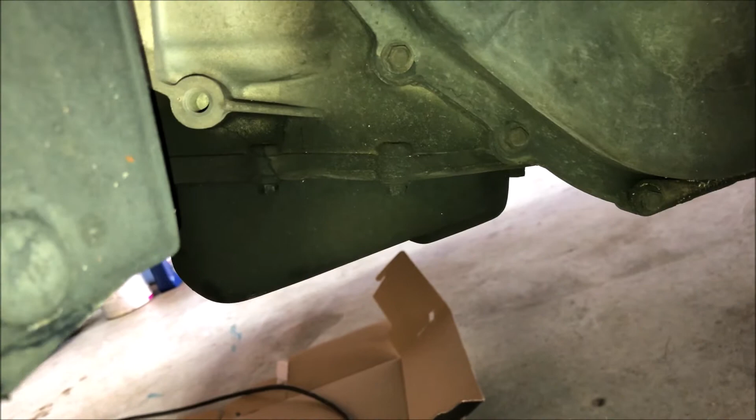So hang with me and we'll get to work. I'm on the driver's side, let me show you what's going on. This is the side of the transmission here on the driver's side, and you can see, I don't know how well it comes out on video, but there's a lot of dirt, and looks like after driving it for a while, the cover looks wet and grimy, like there's some oil. That's what I saw when I was rotating my tires, and it made me want to look at it a little further. So now I'll crawl underneath and show you what's going on.

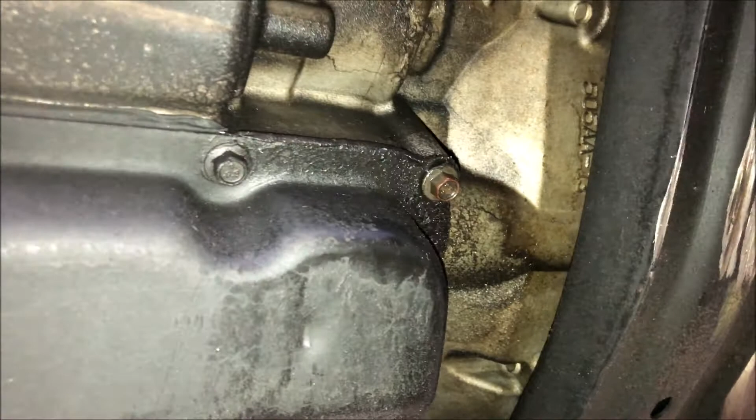Videos underneath vehicles are always kind of hard to actually see what's going on. This van has about 90,000 miles on it. We bought it new, so we're the only owner. The service manual says you don't need to do anything with transmission fluid for over 100,000, 120,000 miles, I don't know. Some other sources though say you should change it every 60,000. So either way, I think it's time to just change it out, since it's a pretty simple process.

But if you look at this bolt right here, it's actually wet, and that's transmission fluid. And you can see over on the transmission here, it's wet up back here as well. And on the transmission cover around this corner, it's wet and grimy. So I'm pretty confident I do have a small transmission fluid leak. I've been checking the levels, it's not dropping significantly, but there's definitely something going on. And like I said, it's 90,000 miles. So I'm going to go ahead and drop the pan, replace the filter and the fluid, and hopefully get rid of this leak.

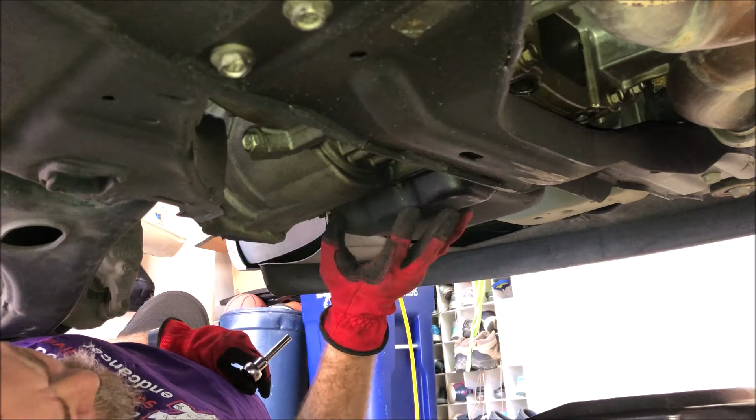There are 12 bolts holding the bottom of the transmission pan up. You can use an 8mm socket, but I find that a 5/16 actually fits a little bit better, so that's what I'm going to use. I'm going to break the torque on all of them just to make sure they'll actually move. My plan is to remove the ones at the back and leave the ones at the front installed so that the pan can hinge down, and hopefully, if all goes well, the fluid will all show up in the catch pan and not go everywhere in my garage. We'll see how it goes.

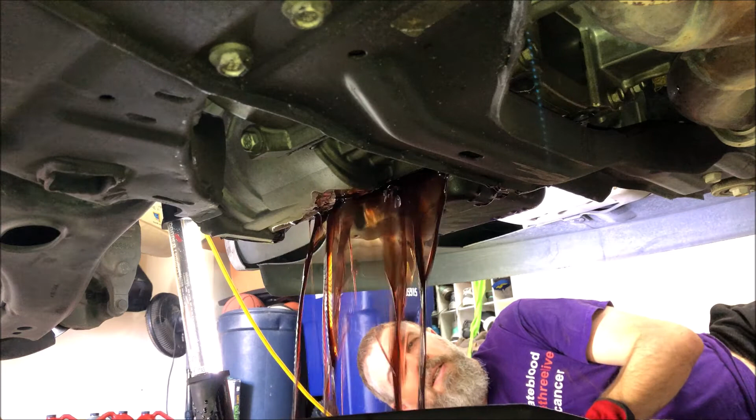Someday I'll be able to not mess up the floor. Today is not that day.

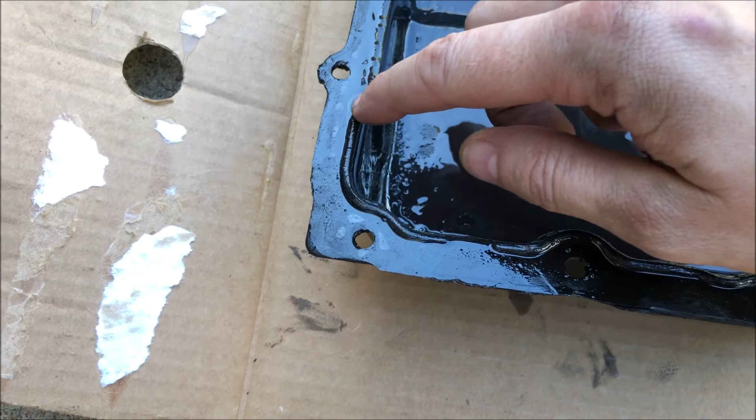You can actually see the gasket material is missing over here, which is probably why I was having the leak. The magnet is over here, and that's a good amount of gook. It's all really fine particles, so I'm going to go with the mindset that it's fine, it's just 90,000 miles, and we won't worry about it.

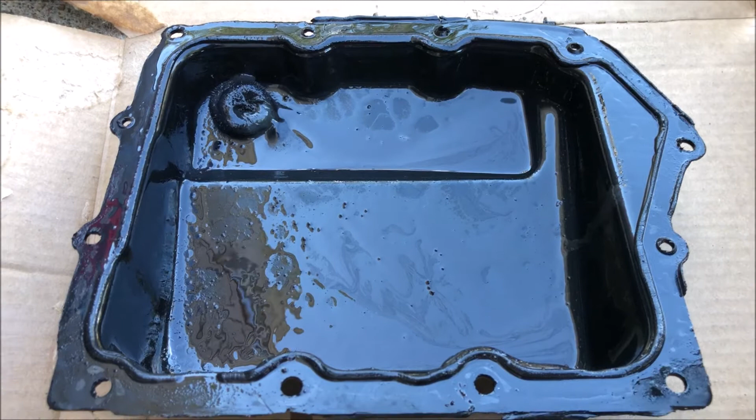So I'm going to clean it all out and remove the gasket material, and then get ready to put it back on. I have cleaned off the gasket material from the cover, cleaned out the cover, got some brake clean in there to get it all cleaned out well, magnets cleaned off, took a wire brush to the bolts, so the cover's ready to go back on.

Now I need to get up underneath, remove the filter, and clean the mating surface so that the new gasket and filter can go in. To remove the filter, there are two T25 fasteners up here, so they're Torx tips, you need to have a T25 bit ready, and you just remove the two bolts and then wiggle and pull the filter out, because it's actually sealed up in there as well, there's a seal you're fighting against. Now before you pull this out, you need to realize there is still fluid in the filter, so make sure your catch pan is underneath it and dump it into the catch pan. Try not to get it on the floor.

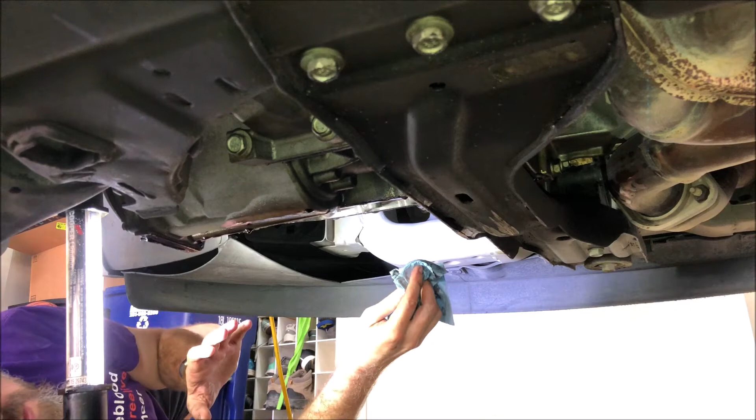Now that the filter's out, the next job is to clean everything off. Clean any gasket material off the mating surface, and there's also the seal up here that some videos say will actually come out with the filter.

I've never had that experience. You want to try to remove that seal as well without damaging the bore, but I'm not going to take the risk of damaging the bore by fighting with the seal. I'm just going to reuse what's in there. If you disagree with my choice, I'd love to hear your thoughts in the comments.

I'm going to put the new filter in place. The new filter goes in the same way the old one came out, and I'll put a link in the description for the filter and gasket I'm using. Just put this spout back up into the seal, then tighten, but don't over tighten those two Torx tip bolts.

Okay, so I have all 12 bolts back in. They're all hand tight. So next I'm going to get out the torque wrench and torque each of them to 105 inch-pounds in an alternating crisscross fashion.

Okay, all torqued, triple checked. So now I'm going to put the wheels back on, put it back on the ground, and we'll fill it up. All right, so the van is back on the ground, and the next question is, where do you put the fluid in?

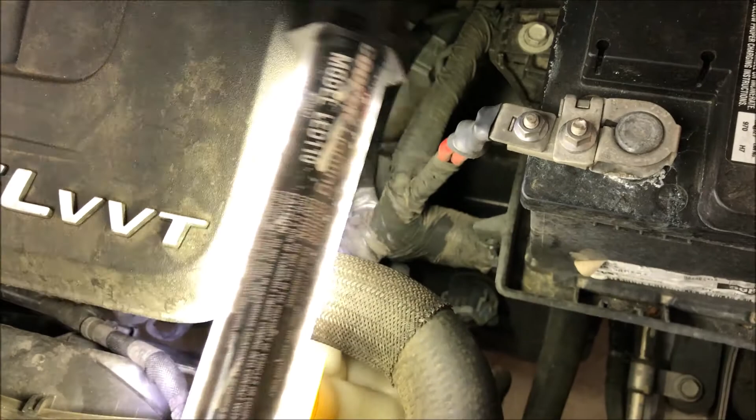It's kind of hard to find unless you've looked for it a few times. So the easiest thing to do is, there's your battery. Then you've got this main harness running off the battery, and you see how it comes together into a junction. Underneath it, right here, is a cap. It's a quarter turn cap, and that's the top of the funnel, or the tube that fills your transmission.

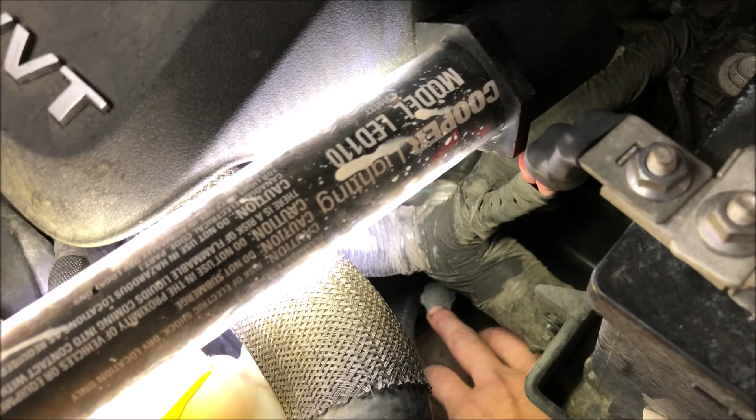To take the cap off is pretty easy. Just unscrew it, take it out, and now you can put a long funnel in there and fill up your transmission fluid. So that I don't lose this cap, I put it right in this hole. It's perfect, like it was designed for it.

The words of wisdom are to measure the amount of fluid you pulled out of the transmission and put that much back in. The total capacity is something like 5.5 quarts, but there's still fluid in the transmission, so you don't want to just dump 5.5 quarts into it. You definitely don't want to overfill it. So you're thinking to yourself, how do you know when it's at the right level?

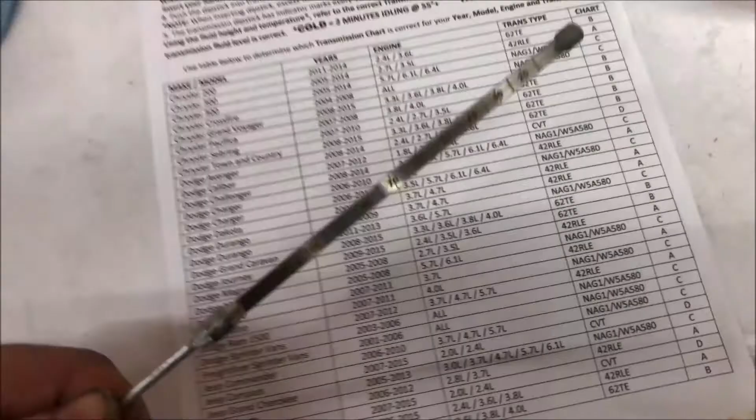Well, since these don't come with dipsticks, there are hacks out there where you can modify your oil dipstick to give you level readings. I've done that with mine, and I've marked it, and I'll leave a link to the video that showed me how. But for this refill, I bought an aftermarket dipstick that I'll also leave a link for, and it has measurements in millimeters for a more precise reading, and it comes with a chart to tell you what your readings should be.

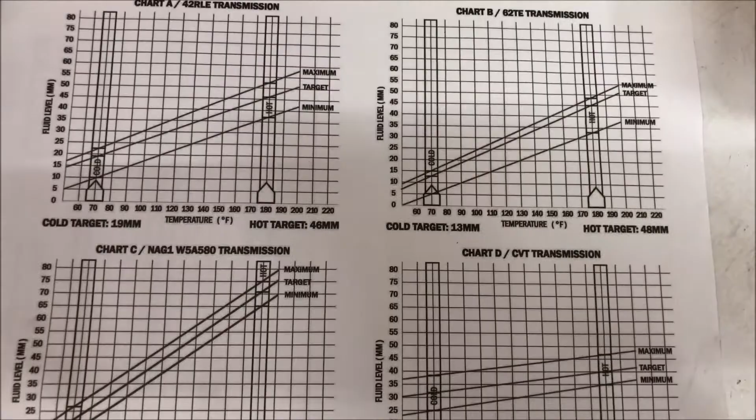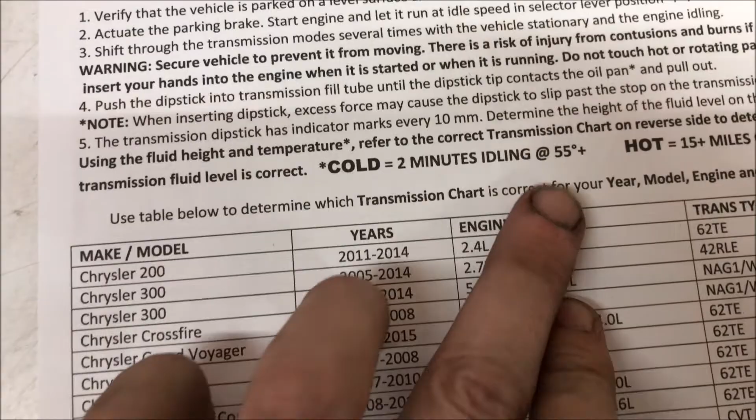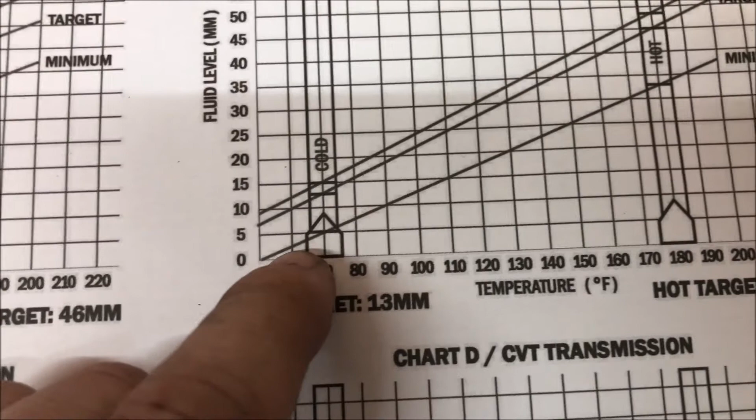So we have a Dodge Grand Caravan, a 2015, so we need to use chart B on the back. You've got 4 different charts to look at. We're looking at chart B, and I'm going to do it at a cold reading. It tells me cold is 2 minutes idling at 55 degrees, and gives you lots of instructions. So the target for cold is around 13 or so millimeters on the dipstick.